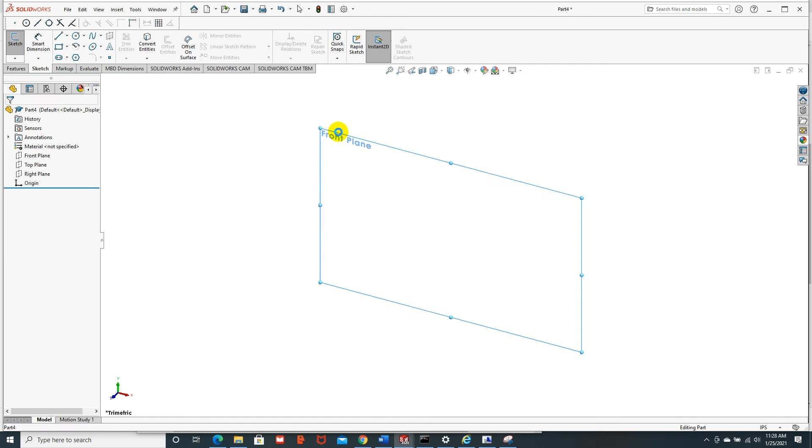I'm going to take a look at my drawing. It's 6.5 inches by 4 inches, and it's a symmetrical part. So what I'm going to do is draw half of it, and I'll start by drawing a center line down the middle, then take it from here and move it down like that. I think I'll even put the origin right there as well.

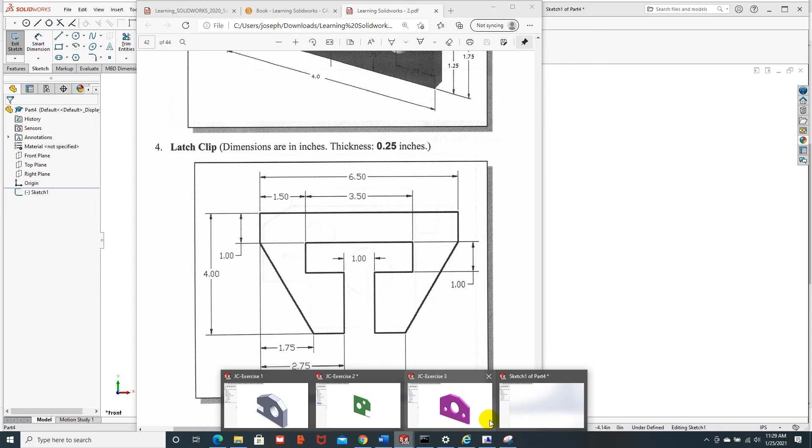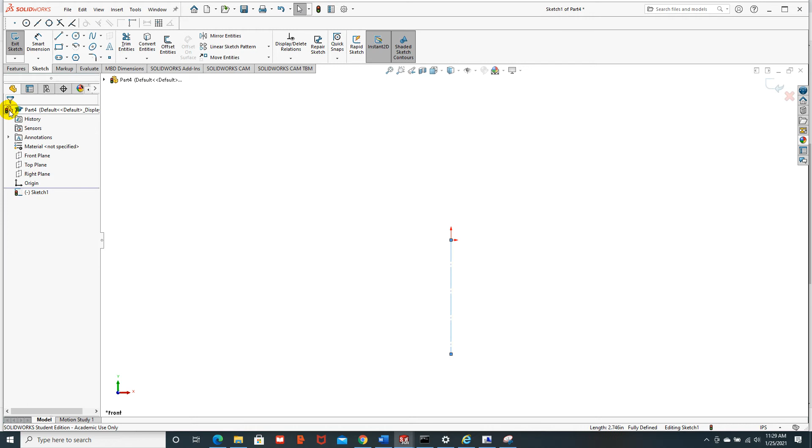Start with my center line, and we'll just drive that down. Hit escape. Now this should be a center line. I guess it doesn't look like it is, so I'm going to change it to for construction. And then as I look at this print, I'm going to do half of this unit, so I'll do 3 1/4 and then 1 inch.

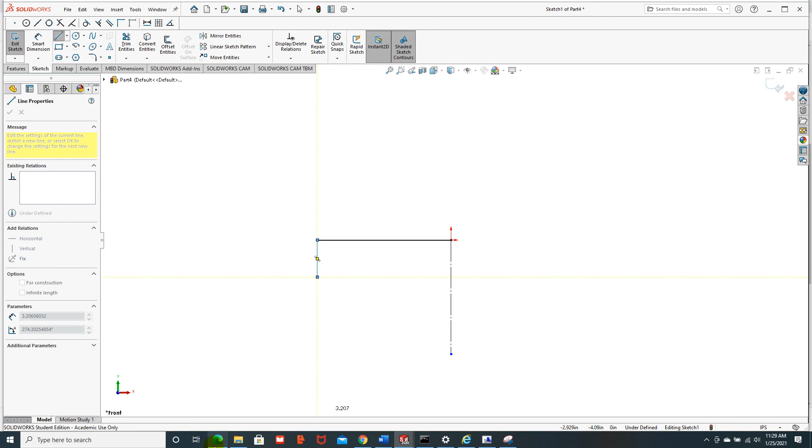Hover to acquire the endpoint. Okay, so that's half the part.

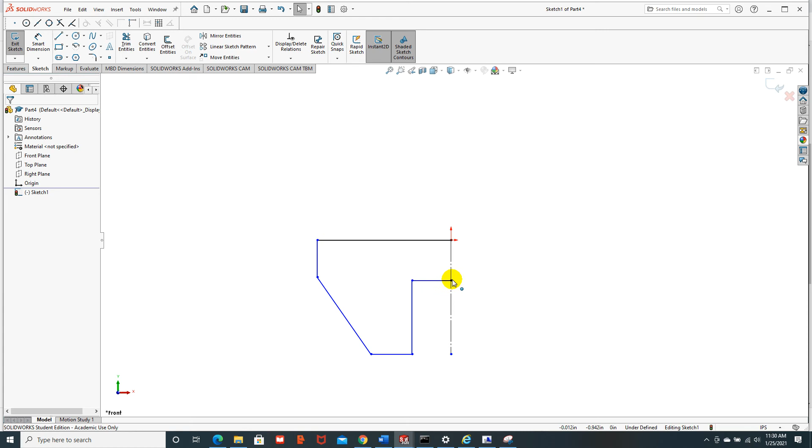And apparently I need to add this other part here, so let me go and fix that up. There we go. And then we'll mirror that.

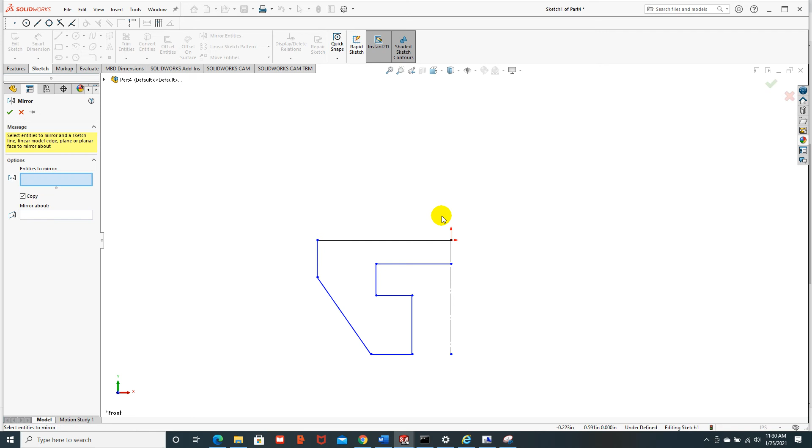About our construction line. And then we'll start to define that with smart dimensions.

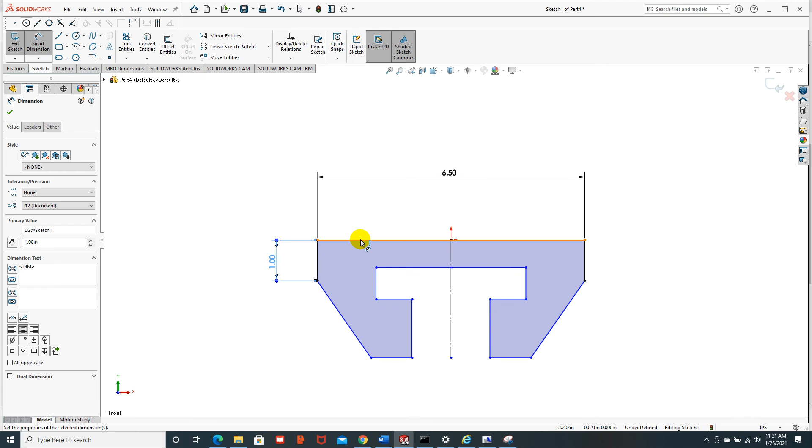You can pan and zoom by turning the wheel on the mouse or holding shift and pressing the middle mouse wheel.

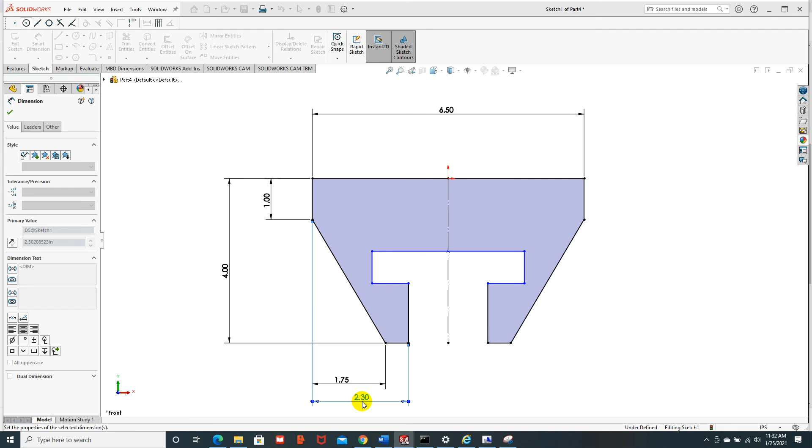Since we mirrored it, what's nice is that it keeps these symmetrical relations for us.

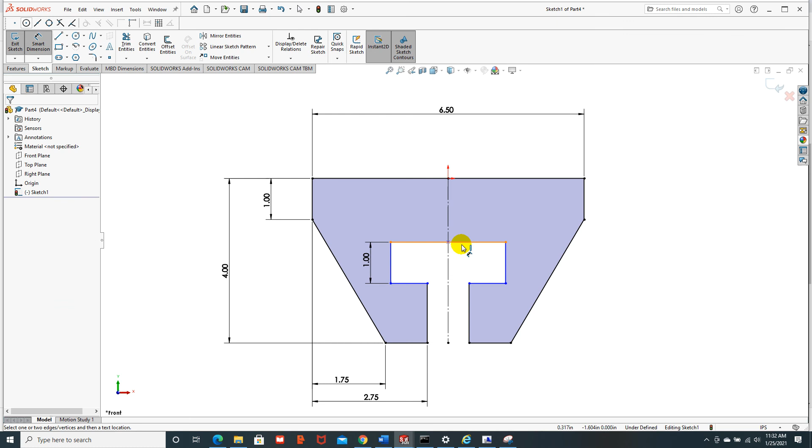And that one's not going to work for us since it's already got this dimension right here, as well as that one since they're symmetrical.

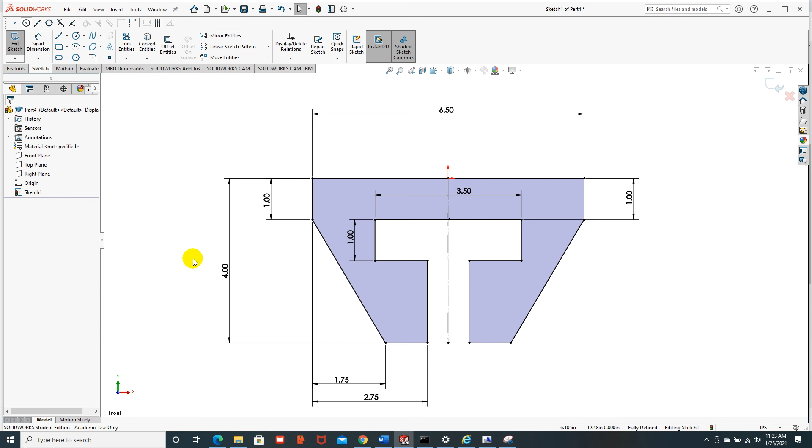Okay, so everything has been drawn, everything is fully defined. If we take a look at this, it's going to tell us the dimension for the thickness is 1/4 of an inch. So we're going to go to Features, Extrude Boss Base.

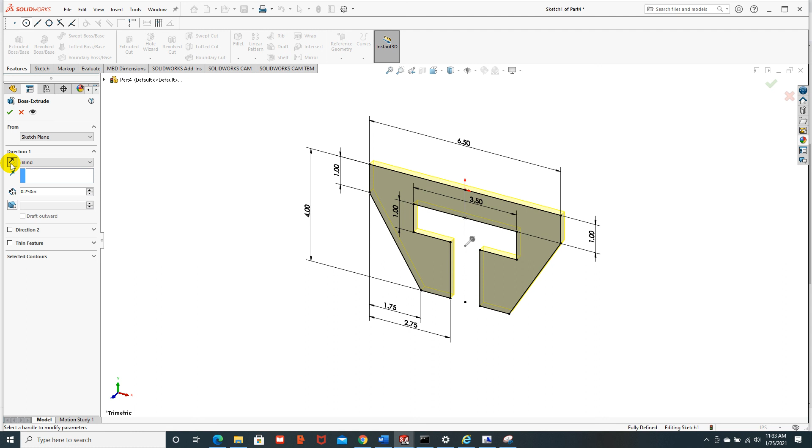And we're going to extrude that 0.25. I'm going to reverse it. Green check mark. Let's make a color.

And we'll save that as exercise 4. And that completes this exercise.